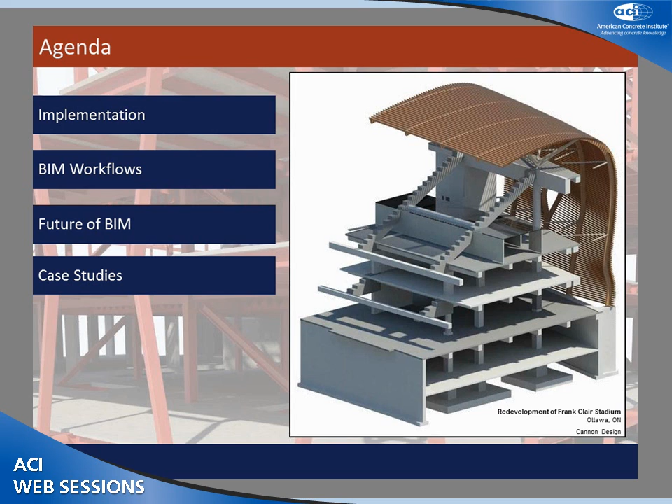And with that, I'm going to move on. I'm going to talk about implementation, BIM workflows, what I think the future of BIM is, and some case studies. As is likely to be the case, I'm third, so some of my points have been talked about already, so I'll be very brief about some of those things.

At Halsall, I think we look at BIM as a very different set of systems. Everybody's talked about Revit or Navisworks so far this morning. We consider BIM as any modeling tool that we use to develop information besides just structural sizes and elements. So we've been working in a BIM kind of environment for a long time. In fact, we were the beta test center for Revit Structure in Canada.

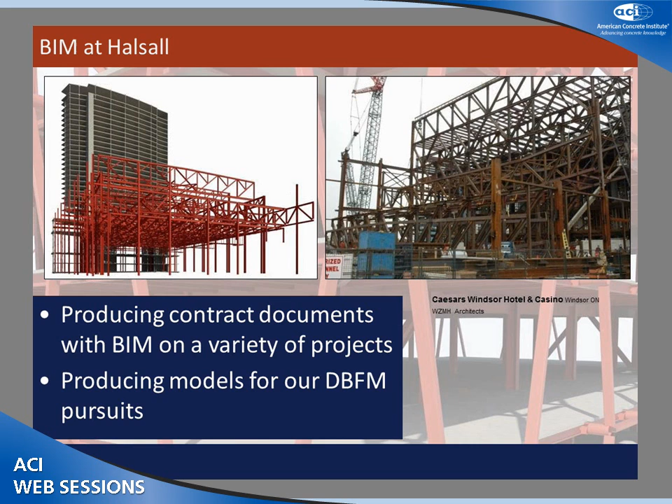Neb and I worked on projects, including this one here, where we used models of various forms to look for clash issues. This happens to be a very complex system where there are trusses spanning one direction and another set of trusses spanning perpendicular to those trusses and nested in between one another. So you can imagine the potential for clash scenarios there.

Another project we also worked on, very complex. Again, this is pre-Revit Structure days, but there was an integration between our design models, the fabricator's drawings, the architectural massing models, and everything else.

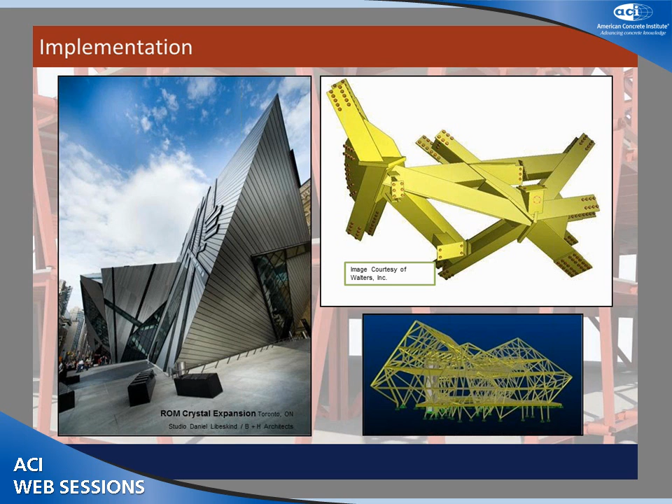And you can look at the complexity of that node of connections and imagine how difficult it would be as a structural engineer to review the connection designs for those elements without being able to look at these things in 3 dimensions. And then also understanding that a bolt was predefined to be of a certain size and grade, et cetera. So we could not have built this building without having models.

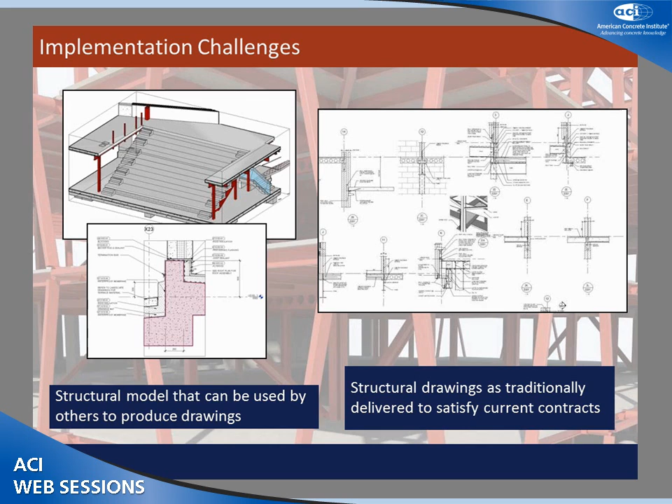There are a number of ways that you can use models. We have a lot of projects where nobody else is using Revit, for example, except us. And the constructors use our models independent of everybody else to do studies on various things. But once you're into a model that is transportable between systems, anybody can take it and probably put it to some very good use, like the mechanical trades, for example, as opposed to just a flat set of documents that is typically still used as defining the contract parameters, per se.

Implementation challenges. If you really want to model a building properly, you have to pull your work forward dramatically, and that means everybody needs to pull it forward dramatically. One of the struggles we have as a structural engineer is mechanical engineers not doing their work until very late in the project, and architects continuing to design through time and space when we're actually building the projects.

Humber River Regional Hospital, for example, is over 1.6 million square feet, and we were awarded the project, and we were in the ground building the foundations within about 3 months of getting the project. So a lot of work has to be done ahead of time, and models need to be built in order to send it.

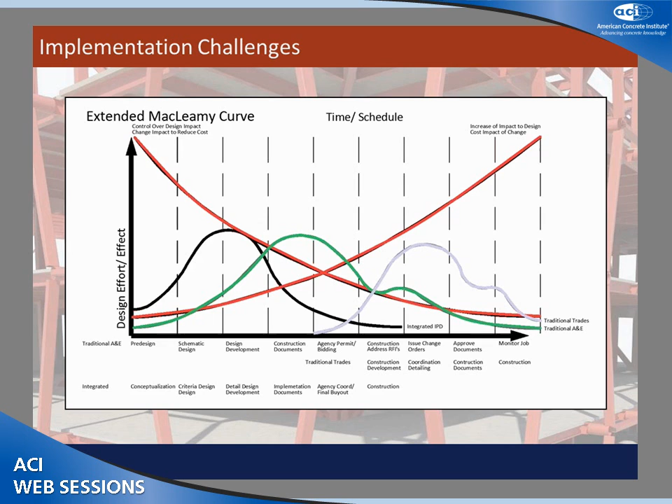So the black basically indicates where we should be focusing all of our efforts in terms of building models and developing details. Unfortunately, I think in the BIM world at this moment, designers and to some degree constructors are working on that green line, where a lot of the work is still happening way too late in the project. So it all needs to be brought back to be much earlier in the project if you're really going to be successful.

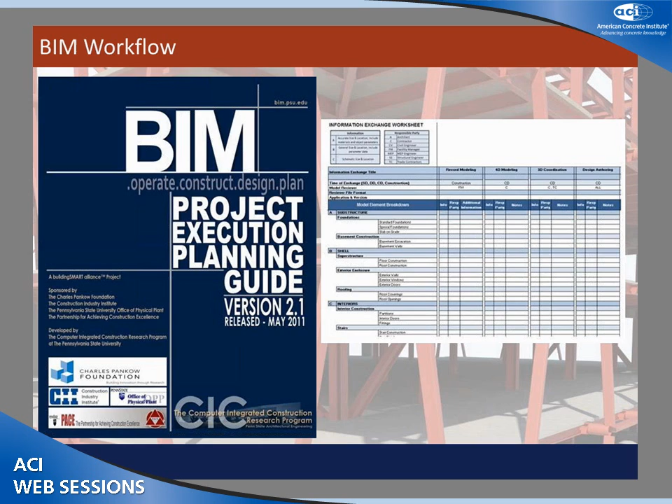BIM workflow breakdowns—you saw the Alice Dawn presentation talk about this. This happens to be a Penn State version of that. We've used these to various degrees on projects, defining who's responsible for what, and where and when.

But here it goes back to the people again. You have to set up appropriate people first of all—you need appropriate people leading the project at various levels. You need collaborative individuals, not people who are like computer geeks who want to sit back and just work on stuff. They have to be able to communicate. If you don't have people who can communicate on the phone, by email, or in person, you won't have much success.

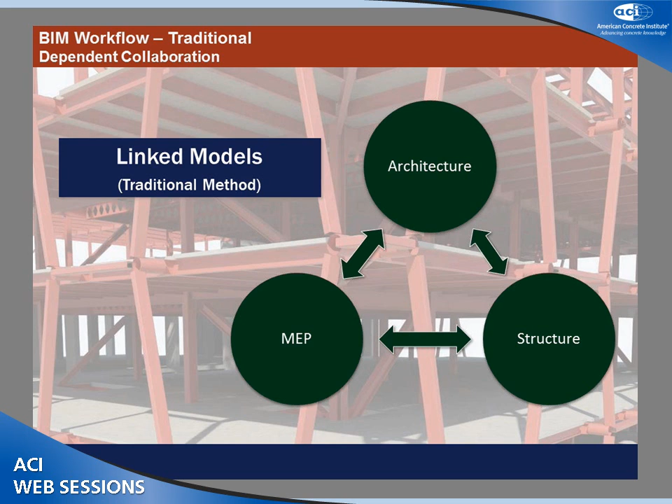We've worked with different kinds of models. One, the traditional method where you have linked models. There was a discussion about the structural engineer having a model because he wants to control the design system structurally, and the architect having their model because they want to control geometry. Well, when you have that kind of thing going on, there's a lot more effort going into coordination, and you have a lot greater risk for problems being set up.

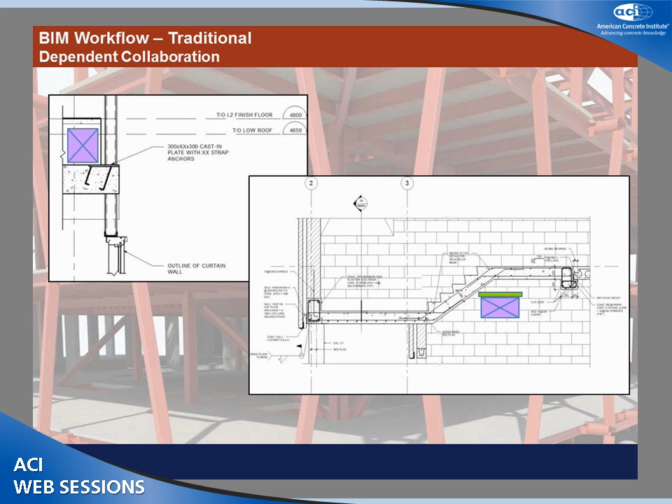So ideally, everything is up there, it's coordinated, everything's in its right place. If you're not watching out, what can happen? Somebody moves a slab edge, and all of a sudden you have nothing lining up. Maybe the shelf angle is correct, but the beams and the reinforcing of the walls and all your reinforcing shown where it's supposed to be isn't actually where it really needs to be anymore.

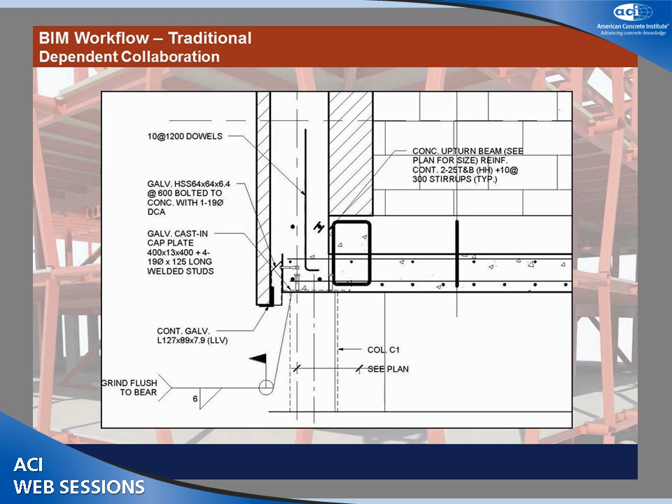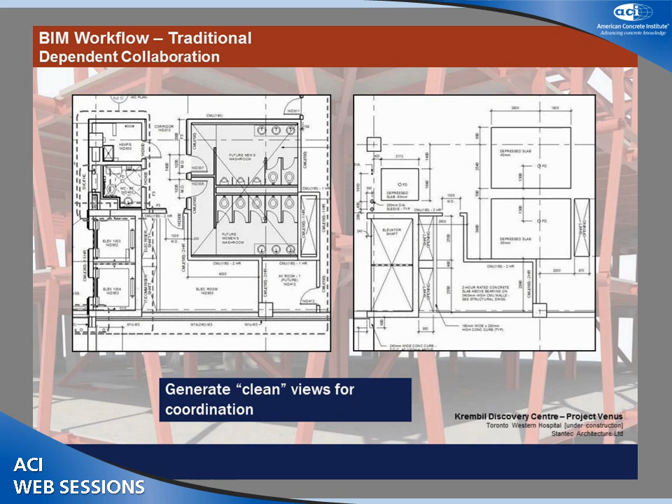You can generate clean views of elements to see—a bathroom looks like a bathroom to most people, but to a structural engineer it can mean a whole lot of stuff, one of which is a lot of depressions in your slab that you have to consider in your design. So if you have rules set up by establishing particular workflows at the beginning, where the architects define these spaces appropriately in their model, we can very quickly define what it means to us structurally.

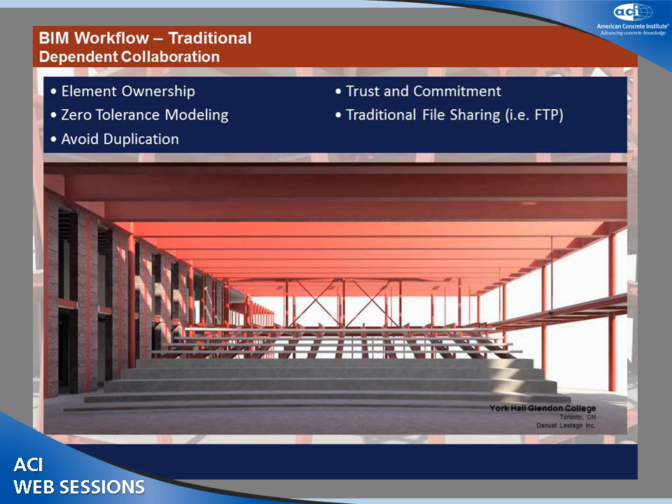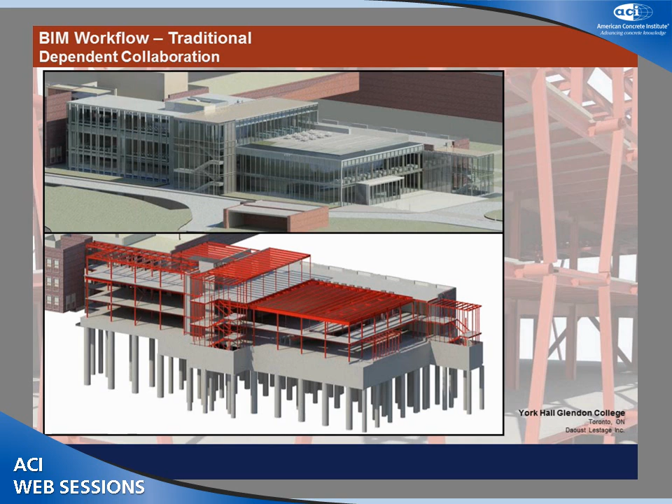If you're dependent on one another, zero tolerance modeling is absolute. We have old-time draftspersons who've been around long enough that they drew everything by hand and would plug it in by hand. So when they went to AutoCAD, many of them would just spot it and plug it in as opposed to using an insertion point. Well, you can't do that. You have to have people who are committed to using the tools properly and inserting a column at an exact location, which can be handled or managed through appropriate significant figures, and be, for all intents and purposes, within a zero, plus or minus zero tolerance.

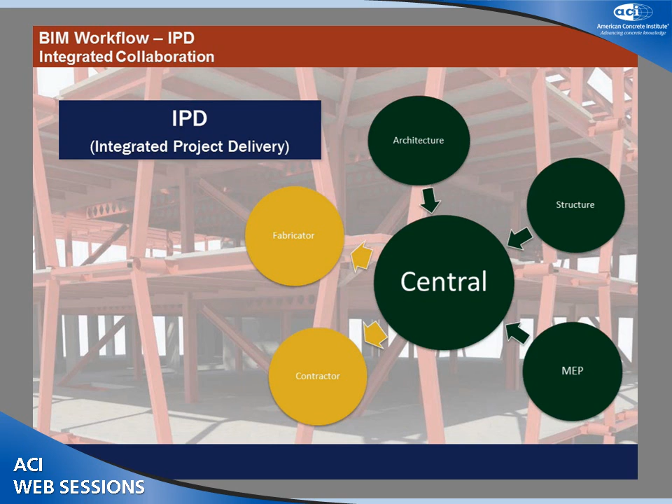And you can see this happens to be a project where we did a model and the architect imported our model and relied totally on our model. So you can see our model layered in behind their model. Ideally, when you're in a large project, you want a central model, but that creates some issues—again, who controls what from a geometry standpoint? We try to set it up so that we control and own columns, walls, footings, that sort of thing, and the architect needs to talk to us, negotiate with us, let's say, if they need to move it.

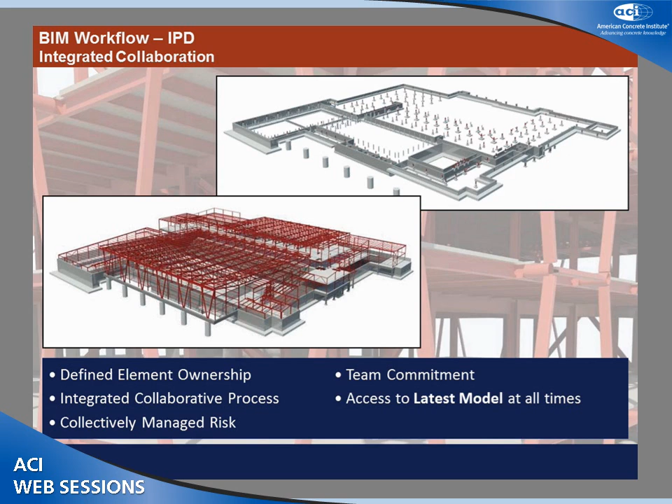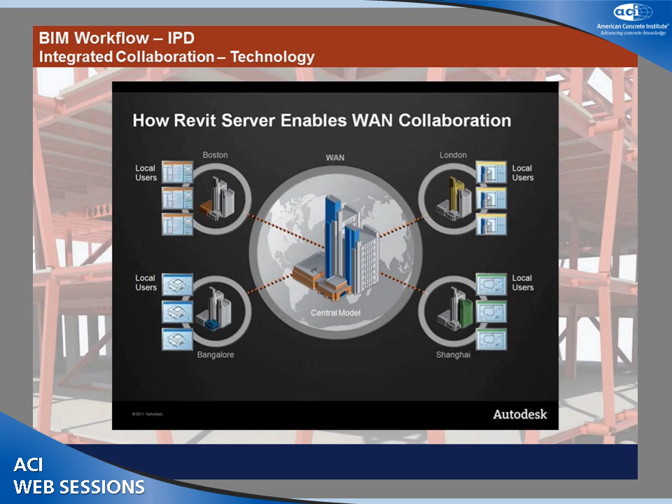When we get into true integrated collaboration, you need a lot of computing power. We have clients that we work with around the world using these systems. There are accelerators, riverbed accelerators that work nicely to speed up packet delivery between one another. But Autodesk, for example, has Revit Server, which enables even more positive collaboration time frames of what stuff is moving in and out. We do have a client who doesn't want to use Revit Server for whatever reason, and we check out pieces of the model and check it back in. It shuts your communication down by lots and lots of time, because if you're sending something over a busy set of DSL lines, it takes time for a central server, let's say in Edmonton, to answer you back in Toronto.

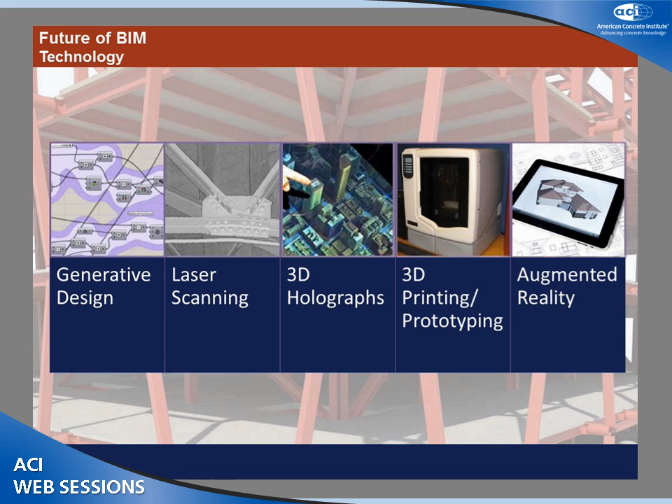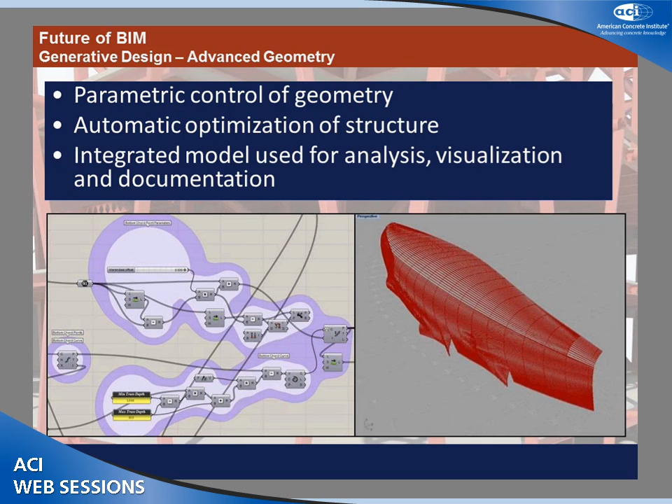What's the future? Again, a lot of people involved. We're not going to disappear. Generative design, laser scanning, 3D holograms in terms of client engagement, presenting things, 3D printing, something we call augmented reality. Normally I would show this to you in a video, but I'm being old school, I don't necessarily trust the software, and videos don't always work when you do presentations.

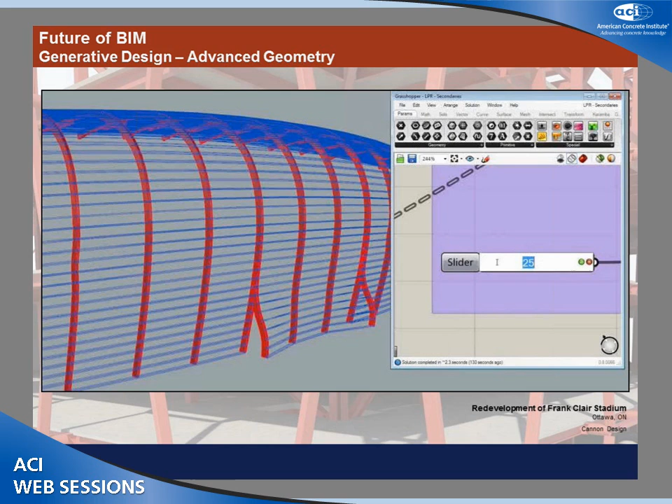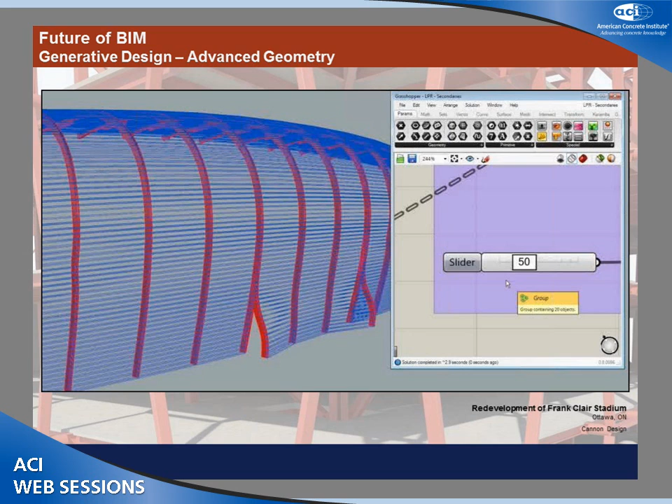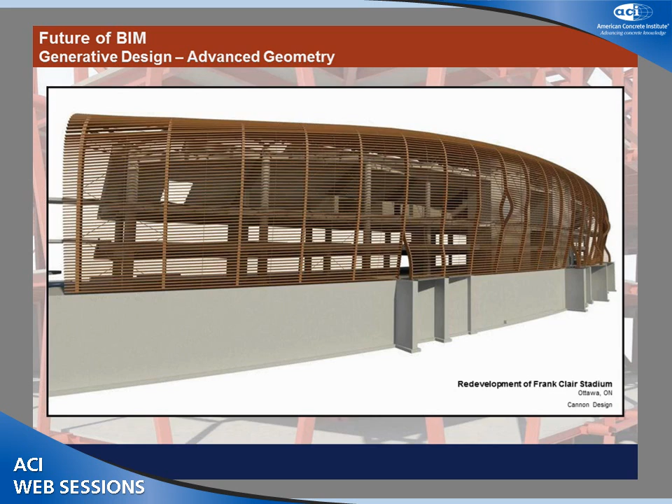So you'll see what can happen. This happens to be Lansdowne Stadium in Ottawa, which is a combination of a timber structure, which the architect defined the elements in Rhino, and we built a model using Grasshopper, which would translate and modify their initial Rhino model to certain densities of elements. So these are timber frames, main timber frames, that then have secondary elements that create a bit of a screen system on it. And if you adjust those, you see those sliders moving, the density of those elements change, and it's instantaneous in the model. You can play with it. This is only one level of something that you can do. Anyway, this turns out to be what the finished product is going to look like, integrated within the Revit model of the concrete structure behind.

Here's a sort of an R&D project that we're doing internally to do a little bit more broader linkage between different modeling, BIM level pieces of software. And the reason we're doing this is because we like to have control over the interface. A lot of the software suppliers will tell you that we're totally compatible, that SAP will talk to Revit or whatever. I will tell you that even embedded within Revit is Robot and their own analysis systems, and they even internally with their own systems have trouble talking to one another in implementation. So as structural engineers, we're very, I would say, anal about control over what talks to what and how those discussions take place.

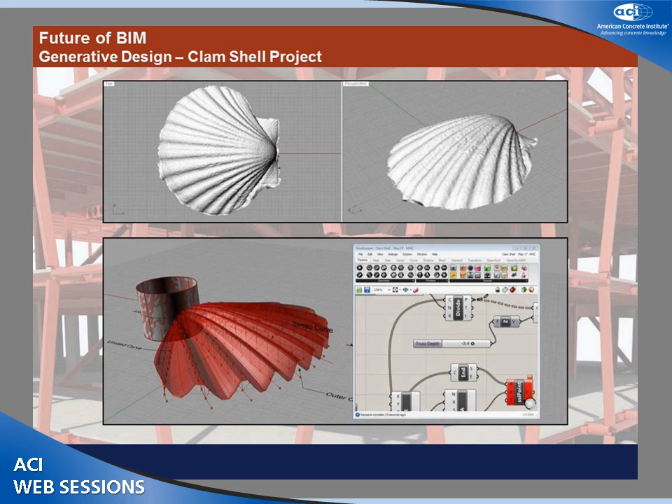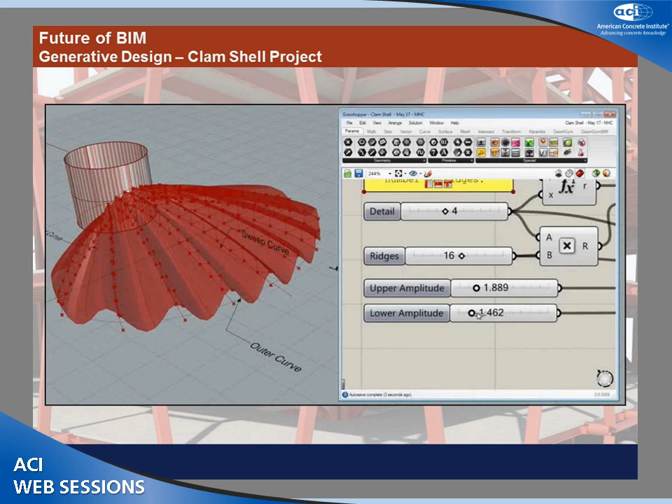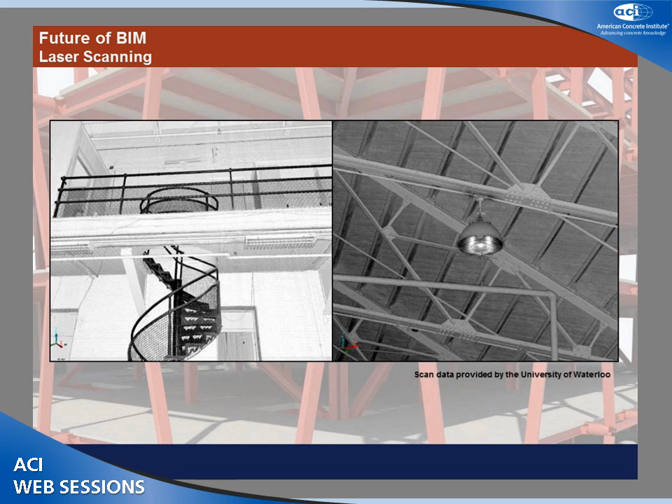What we wanted to do was see if you could laser scan the building, because we're changing the load on it, and those trusses you see on the right have to be analyzed. We had them all measured and mapped out by hand, and wanted to compare how accurate the laser scans would be. You see a photo image of a connection, and a laser image of the same connection. What we found was, for dimensional elements like angle, size, depth and position, we're within 2% accuracy.

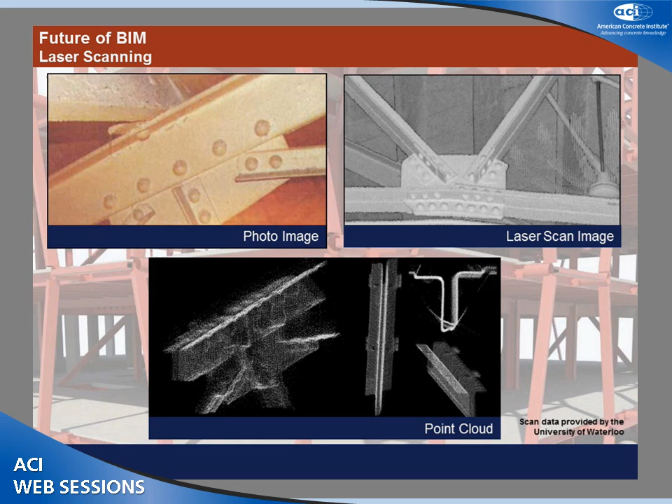We're not quite accurate enough yet to pick up certain details. If you look at the lower picture, the point cloud, you'll see two angles back to back. It's not quite accurate enough for us to get the thickness of those angles, but we're close. So from an architectural or existing building implementation, an as-built or under-construction scenario—this is the point of the research at the University of Waterloo—what is the under-construction progress going on? How accurately can you have real-time representations of what's been constructed, where you may be able to use a bit more clash detection, not only from the consultant's information but also from what's built.

3D holograms—you can print these things and set them up, and you can walk around the building. Those all get developed based on your models.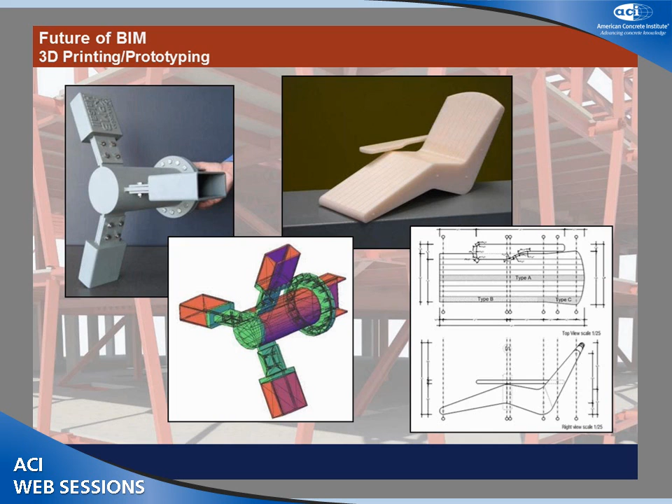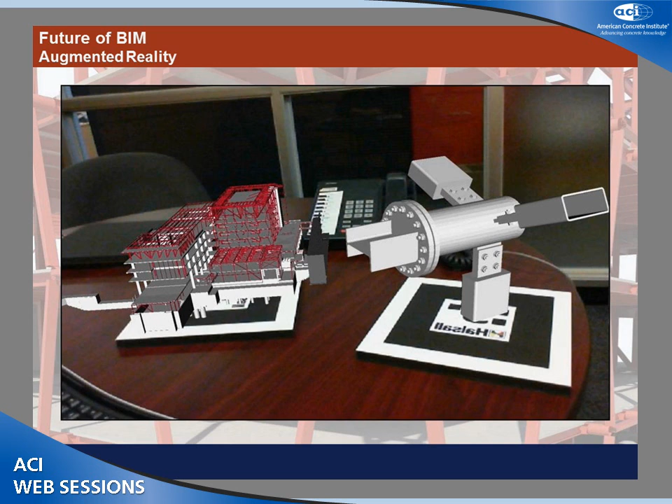Augmented reality is just another way of looking at your model. Using webcams and plates that your computer recognizes, it projects a 3D image on your computer screen, and your client can actually just rotate this piece of paper and move it around to get his own idea of what's going on. So it makes the interface with your model easier for a less sophisticated client, for example, or whoever.

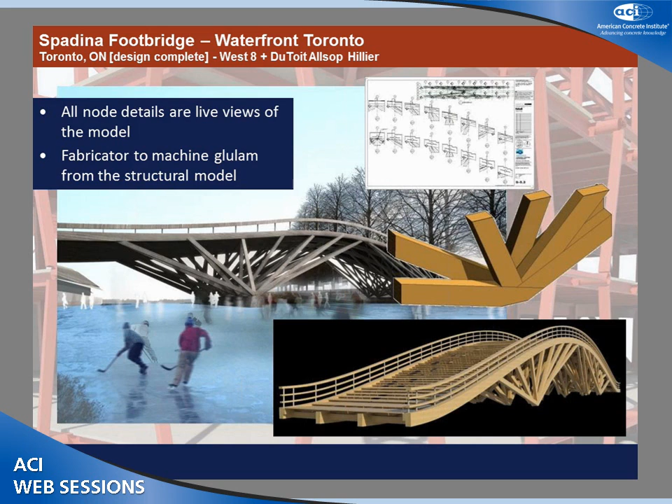Unfortunately, a bridge we designed was supposed to be built in timber but didn't get built—it went on the shelf. The whole idea was to help attract more people to the waterfront of Toronto. However, some of the people who live on the waterfront don't want people attracted there, and being very politically astute, they had this thing canceled on us.

The point was there were multiple pieces of framing elements that had to collect at points, and we set up whole fabrication systems using our software so that all the prefabrication could take place.

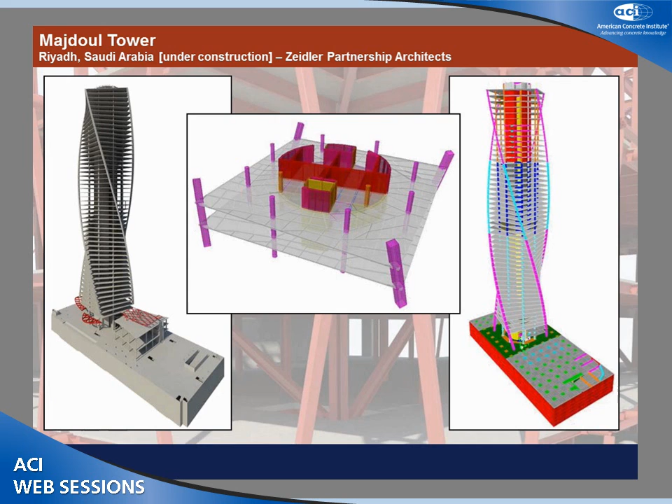Majdoul Tower—this happens to be a Revit model on the left, an ETABS model on the right. There were very complex link beams between the core walls, and concern over reinforcing placement and that sort of thing. So when it really boils down to it, we're communicating the construction to the builders using the Revit model, but refining it down to more detail, making sure the constructability of certain complex elements is in fact achievable.

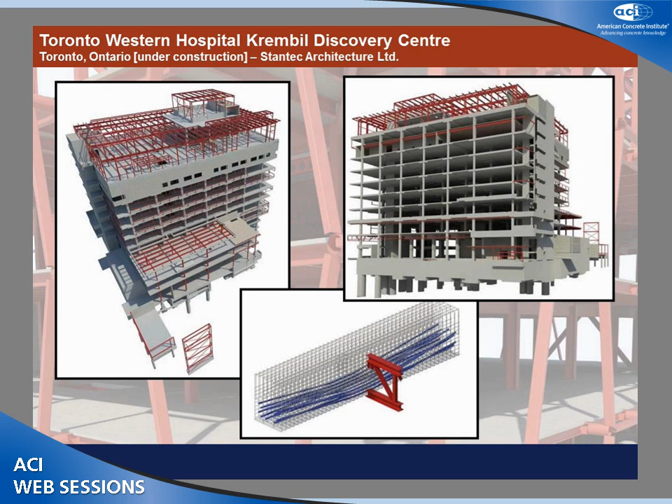Toronto Western Hospital is another example. The element at the bottom is a situation where we had a post-tension beam with a lot of tendons that had to be strung between structural steel trusses, and the constructor was concerned that wasn't going to work. So we built the Revit models and showed them that it in fact did.

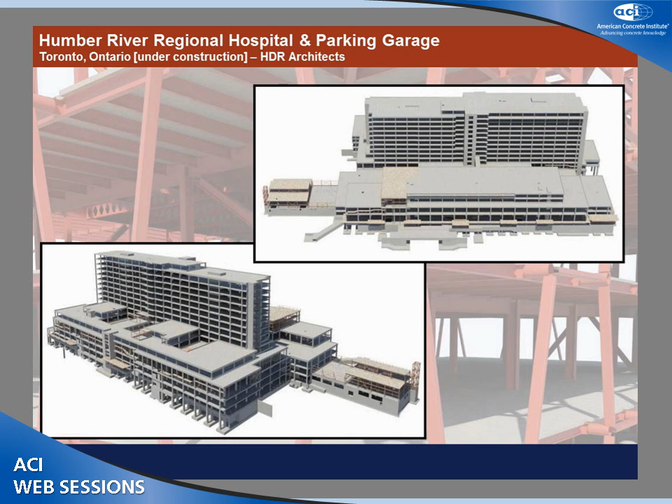We're using it in our office to check quantities. We don't model reinforcing—we say how much reinforcing is going to go into a thing by cubic meter, and then we check that against the volumes that are being poured.